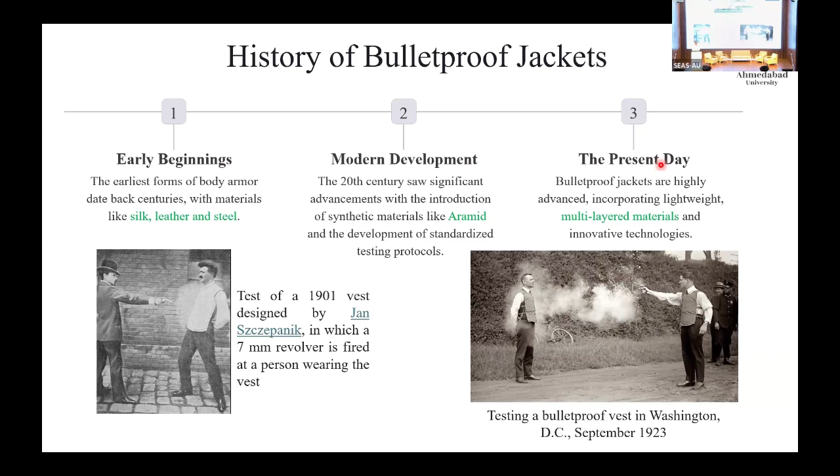Present day, the technologies have changed a lot. Before studying any issue, I call it a virus. So if you have to develop an antivirus, first you should understand what the virus is.

In the Indian context, this facility, or this standard, was defined. Generally we follow US or global standards, but fortunately in 2018 Indian standards were defined. As you can see here, we have designated them as BIS level 1 to level 6.

For your ease, I have mentioned which weapon applies. If it is a pocket-held weapon, probably it's a 9 × 19 mm, so you call it a pistol. This is the smallest possible threat, and there is a speed associated with it and a mass of the bullet. Of course, there are some testing parameters, so you can leave that.

AK-47 you keep hearing about in the news and whatnot. Why so? Because it's an interesting weapon—it's short in size, has a good range, is relatively light in weight, and it has got two locations at BIS level 2 and BIS level 5. You've got the same weapon, but there are two different types of bullets—or at least for now we'll consider two; there are actually more than a dozen.

BIS level 2 has got 7.62 × 39 mm. This is a mild steel core bullet. If I have to differentiate, for the audience from non-engineering backgrounds: mild steel is just like a door frame, whereas your kitchen knife is hard steel. It's really difficult to make a scratch on a kitchen knife, whereas you can comfortably make a scratch on any door or general purpose steel piece.

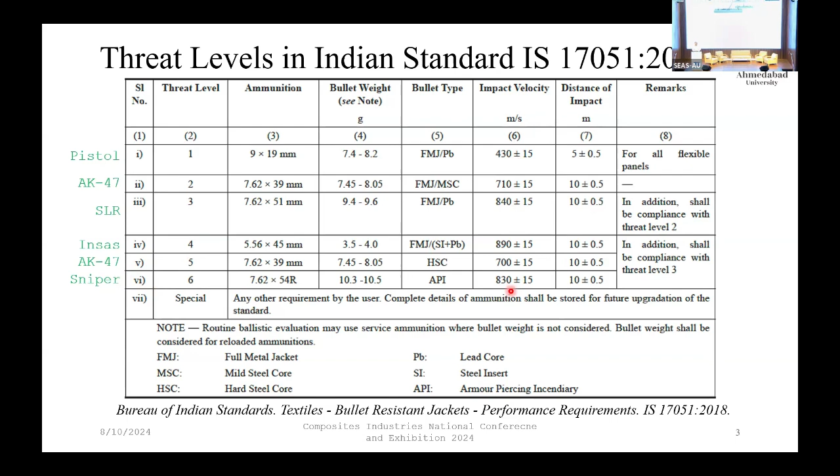So I presume we're all on the same page as far as this is concerned. This is derived primarily from the US standard. In the US standard, that is NIJ, level 2A, level 2, until the end of 3A, that is 0.44 Magnum. All these bullets can be stopped by a soft armor panel. They are relatively easy to stop, or we call them pocket-held weapons.

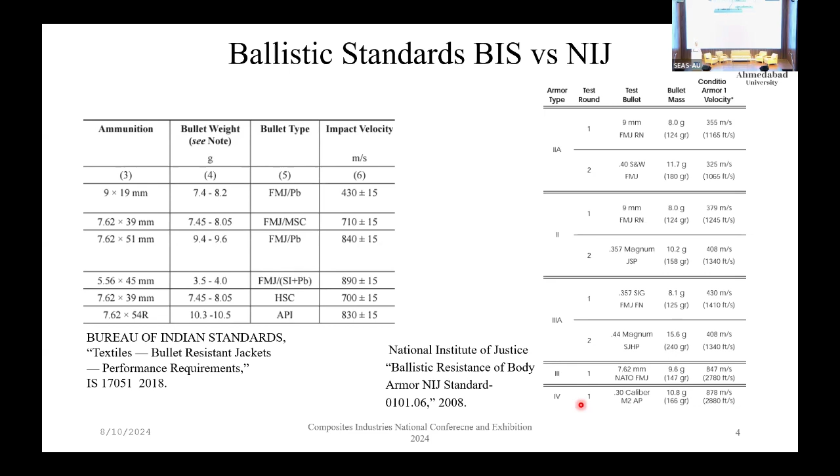After that, they directly have an international standard, NATO standard bullet, that is 7.62 cross 51mm or M80 NATO ball, and then the US has got APM2, which they simply call M2 - that is their US standard sniper round. India generally followed Russia for that matter, so we follow the Russian Dragunov. We have a slightly different version, we call it 54R API, that is armor piercing incendiary.

Now to understand what we mean by that, because we are not going to stop just one bullet - what is the kinetic energy of one? If I look at this, it is just below 700 joules of kinetic energy. If I go to this AK-47, it is above 2000. If we go for the international standard, it is above 3000.

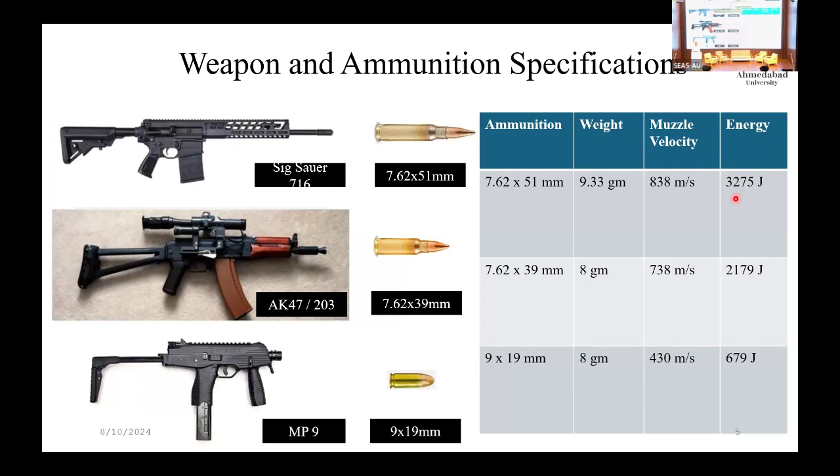But this is really dangerous. It has got the hardest possible core, which we'll see in the upcoming slide. The bullet is the most lethal one, and in reality the energy approaches 4000 joules. 150 joules is more than sufficient to kill a human - the impact, a head injury, is more than sufficient to kill a human. We are talking somewhere close to 4000. So that is the power of the so-called bullet.

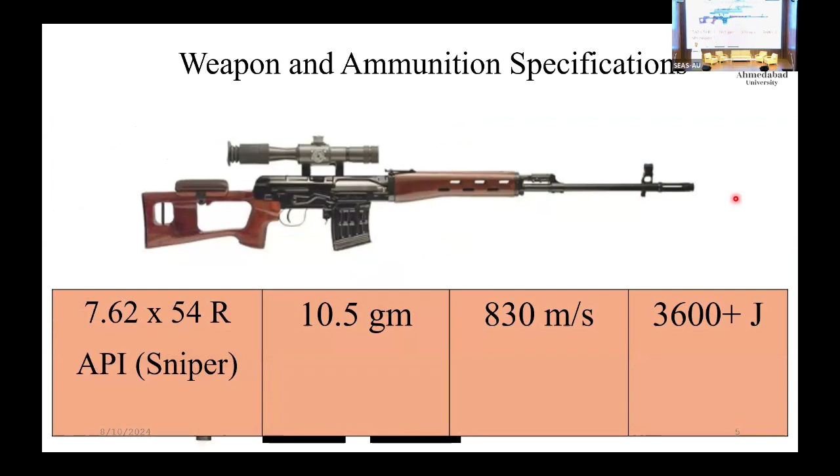Now what is inside this bullet? We used to machine them - we are engineers, so we cut them. We want to know what is inside. So we learned that mild steel has got a relatively flatter shape surrounded by some blackish material, which happens to be lead. And of course, to increase the life of the steel barrel, we always provide a brass or copper jacketing - that is what we call FMJ, full metal jacketed, basically a covering of brass so my barrel is not worn.

If both the barrel and the bullet are steel, then my barrel won't last very long. If we cut the complete bullet, we found there are a variety of cores inside. If we look at only the left side of it, this tip is very sharp compared to the other one - this bottommost mild steel is the international standard AK-47 bullet, which is a mild steel core bullet.

Whereas this one is available only with India and two of the northern region neighbors. If we look at the hardness, typically mild steel core, MSC, is 20 to 26, whereas for HSC it is 50 plus or minus 5. So unfortunately, no plastic can handle this kind of hardness at these given energies.

And if we look at the sniper round, it is even harder. To give a scientific challenge - in India, we do not produce the core. This particular pin you can see, this is what we call the steel core of a projectile or the bullet. We still do not produce this 65 plus or minus HRC core.

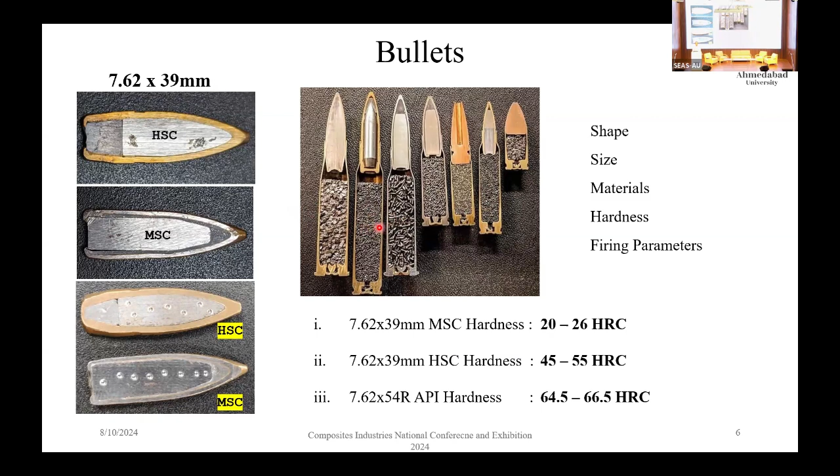And if I know what the other person is wearing, you just need to increase this powdered part, which happens to be the explosive. So let's say you have an Indian AK-47 HSC round - the speed is 710 meters per second. If you increase the weight of the explosive by a few milligrams, your bullet will be moving at a speed of say 750, and you designed a jacket for 710 plus or minus 15.

So that is where the things matter. We are looking for two types of panels. One is the soft armor panel, which is close to or touching the human body. In general, it is termed as the vest. If someone is wearing it, you won't be able to differentiate whether he is wearing it or not.

Whereas a hard armor panel, which is the front side in this figure, has got so many components. The two primary things are: first, we need to erode the steel part. Second, we need to stop the debris of the steel as well as whatever we have broken in the name of stopping this projectile. So we use boron, silicon, or aluminum oxide, as in ceramics. It could be single material or hybrid. That is the front part of it.

Basically, we look to either break the bullet, grind the bullet, or blunt the bullet. Those are the only ways that we can limit it. In the process, we will end up damaging this ceramic. If I am having a cup of tea and I drop it, that too is a ceramic. So ceramics are extremely brittle, very poor in tension. They can't take bending loads, they can't take tensile loads, so they will break.

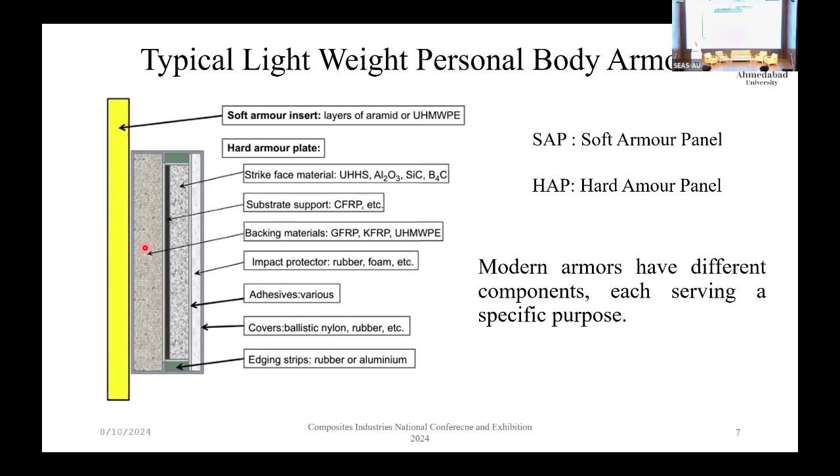So there will be a lot of crushing. Now we need to trap that entire crushed ceramic along with the debris of maybe two or more pieces of grinded bullet. Those need to be stopped. So we need a backing, and for that we solely rely on fiber reinforced composites. Earlier this used to be Kevlar, now we don't prefer that. Companies use it for commercial cost reasons, but UHMWPE happens to be the best serving material.

In engineering, if you are doing something, design is a must. So finite element based simulations or designs are the first step to start with, but unfortunately, in ballistics we don't know the answer. Fortunately, in all other engineering domains, we are not designing the product to damage it. We design the product such that it remains within the yield limit.

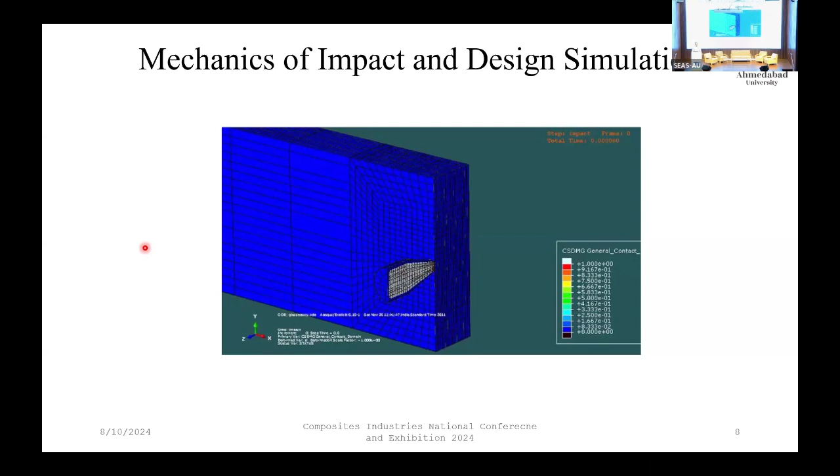We always look for the loading to be well within the modulus of elasticity of a material system, and in case of a bullet, we are very much sure that the very loading point would result in damage — crossing the ultimate tensile or ultimate compression, the ultimate strength point basically. So the challenges are multifold. Still, you need to characterize what materials you are having, determine all possible properties with respect to a ballistics model, and then see how your things are working.

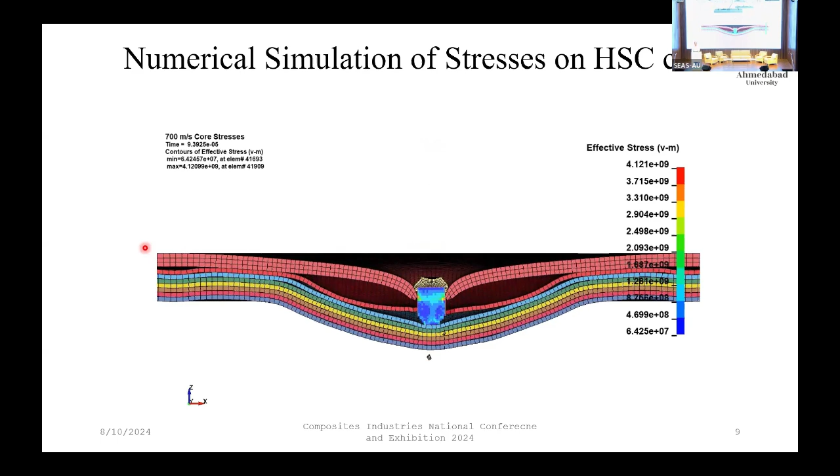So at the top we have got a ceramic layer, and at the back we are planning for some UHMWPE, and we define all the properties. Yet it might not behave like that, because when I fire a single bullet, the bullet is stopped and I can see so many cracks. So can I fire a second bullet? Because there are many unanswered questions.

In reality, a panel will be tested against either 6 bullets or 8 bullets. If it's a sniper round, it's 6 bullets; 9mm will be 6 bullets; in between, all will be tested against 8 bullets, which is quite a large number. It is assumed that a human is wearing a 1000 square centimeter panel, that is the human chest area, and 8 bullets are to be fired within this smaller space. And needless to say, one bullet is more than sufficient to kill a human.

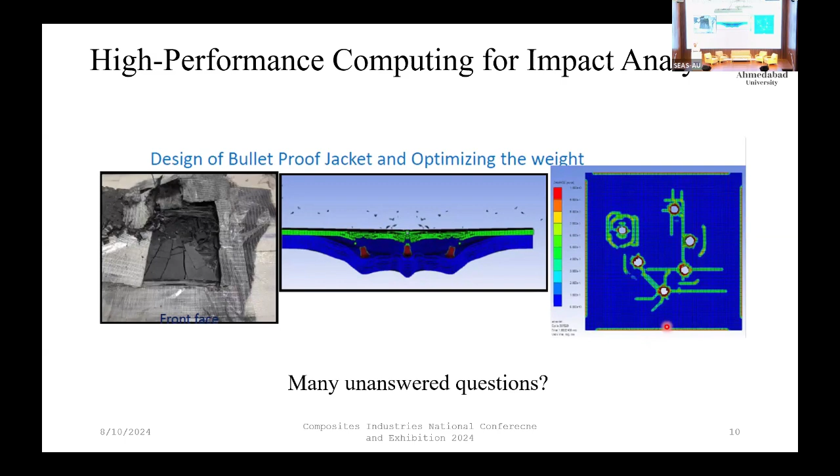So there are many unanswered questions — how these cracks will propagate, what kind of damages will happen. So designing becomes challenging. As Professor Shyam mentioned, he is going to teach these aspects of design in the course of Masters of Composite. So here we see what happens.

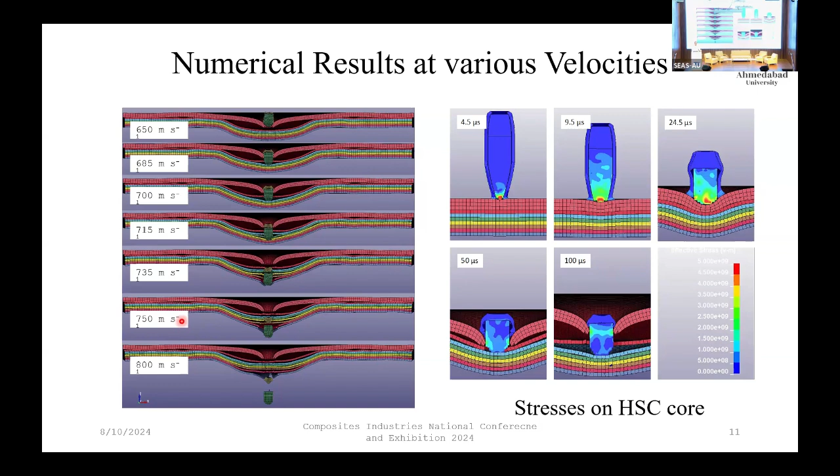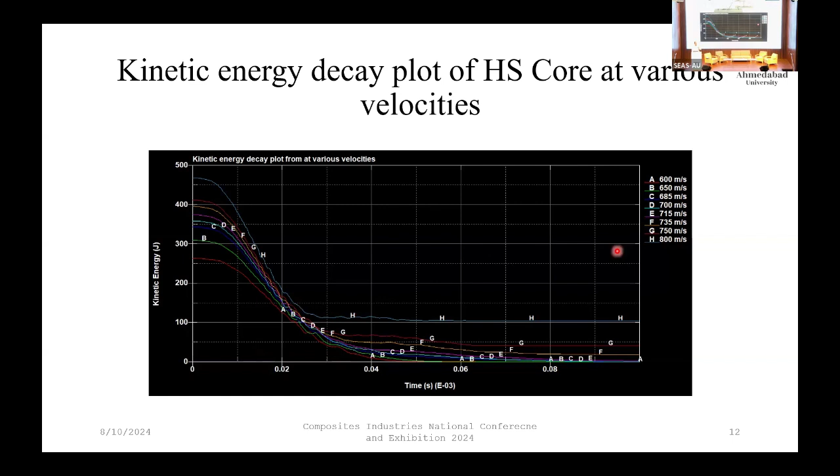Something unique with composites is that it's not a metal. Had it been metal, we could have cast and rolled it, things would have been uniform, but here every specimen has to be made precisely. So things are challenging, and we need to precisely calculate what should be the thickness of the given material.

Kevlar, when it came into existence, was a very good material, but now we have reached the limiting condition of the polymer chemistry of Kevlars, so it can't move ahead much. Whereas UHMWPE started close to Kevlar and now it is moving up. Both the modulus and tenacity, the diameter is decreasing, density is decreasing, and strength is increasing. That is the beauty of UHMWPE.

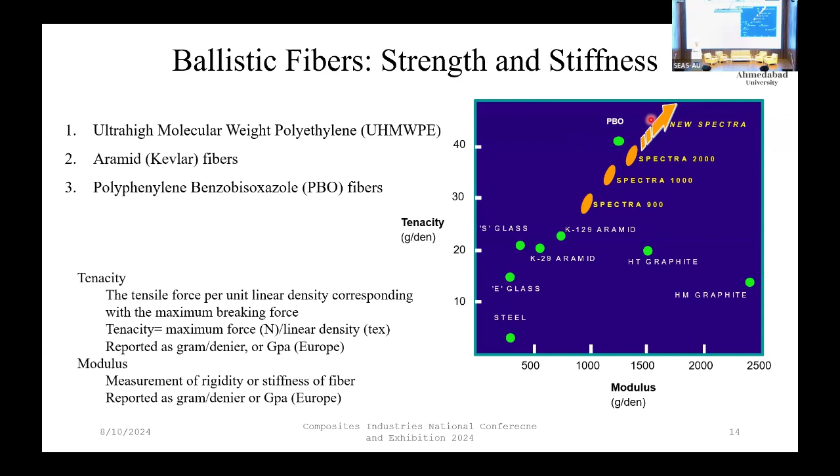Kevlar is the second best material, but there are few issues with it, yet it is required for specific reasons: high strength, excellent chemical resistance. By the way, let me tell you, UHMWPE is that simple plastic bag which you carry for household stuff. It's only the ultra high molecular weight of this polymer that matters. Otherwise, it's just polyethylene, the bag of polyethylene.

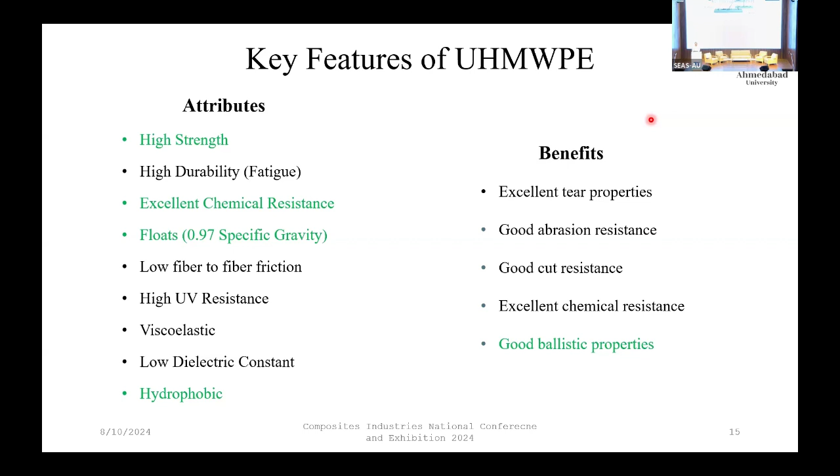The density of a UHMWPE made composite panel is 0.97. Water is 1, so it also serves the purpose of floating a human body. It helps in crossing a river or won't let you drown in an accidental case. Plastics are not happy with water, so they are hydrophobic in nature, they repel it, whereas Kevlar absorbs, or the properties of Kevlar deteriorate when exposed to UV, sunlight and moisture. Whereas UHMWPE is not at all affected by moisture, though light might affect it, but not much study is available. The biggest benefit associated with UHMWPE is its ballistic resistance, the bulletproofing capability, other than its other properties.

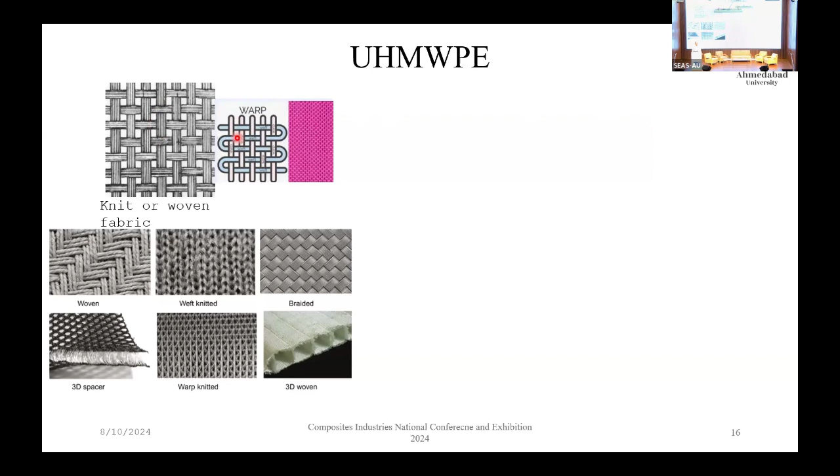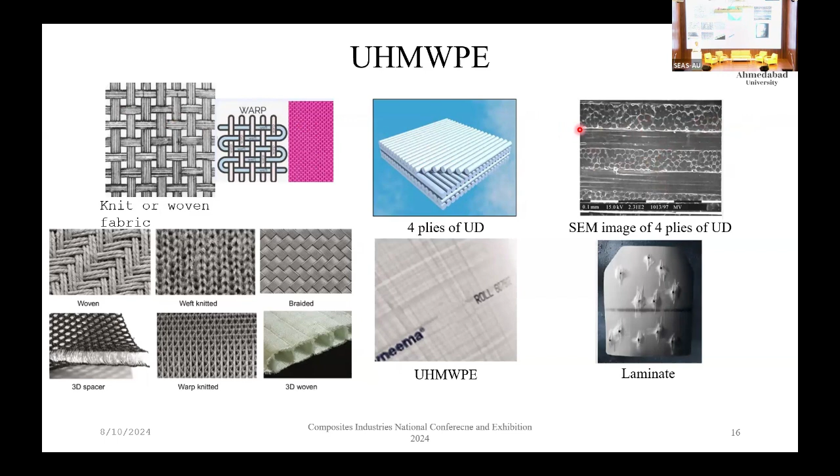That is the reason that in case of UHMWPE, we look for UD ply, that is unidirectional plies. This figure shows most commercial grades of UHMWPE have 4 plies at 0, 90, 0, 90, which makes one thin layer of fabric. If we cut a ply and see it under scanning electron microscopy, this is how they look: the long pipe-type things are the longitudinal fiber, and all the circles are the 90 degree, that is the perpendicular fiber. This is how the fabric looks, and this is of course a tested laminate.

Still, what is the biggest challenge? As we know, it's a plastic, so melting point is somewhere around 142, 144 degrees for polyethylene. Beyond that temperature, things are in trouble. And hardness of bullet is beyond our control because it will be fired. So the moment we exceed the limits of 25 HRC or mild steel core bullet, plastics can't handle that much. We can increase the thickness, we can restrict or limit the kinetic energy had it been lead or mild steel, but since it's a hard steel bullet, AK or sniper, these materials are not going to serve.

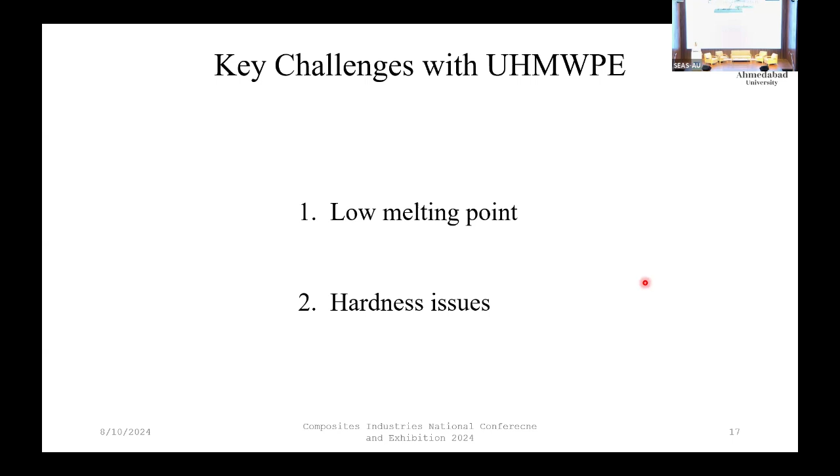Yet we need to stop the bullet, so we studied a variety of materials across mankind. Steel is the best possible option, but density is the biggest challenge, almost 8,000. So the best outcome came in the form of ceramics.

Ceramics have some unique properties: very good compressive strength and the ability to wear any material. The only challenge associated with ceramics is they are very poor in bending and tension. So if there is any bending phenomena, the strain to failure is very, very low.

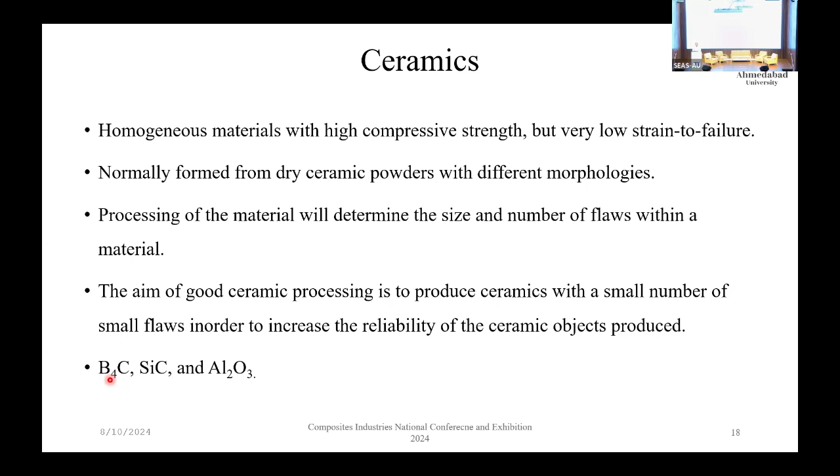So the moment we try to press the bullet inside, it will develop a brittle failure or brittle crack in the material. The most commonly used materials for this case are boron carbide, silicon carbide, and to some extent aluminum oxide. Presently, the cost efficient solutions comprise a hybrid of boron and silicon, because boron is very costly and silicon is slightly less costly, but the density of silicon is slightly higher than boron. So it's like a compromise between cost and technology. If you want the best possible solution, go with boron carbide, but then the costs are highest.

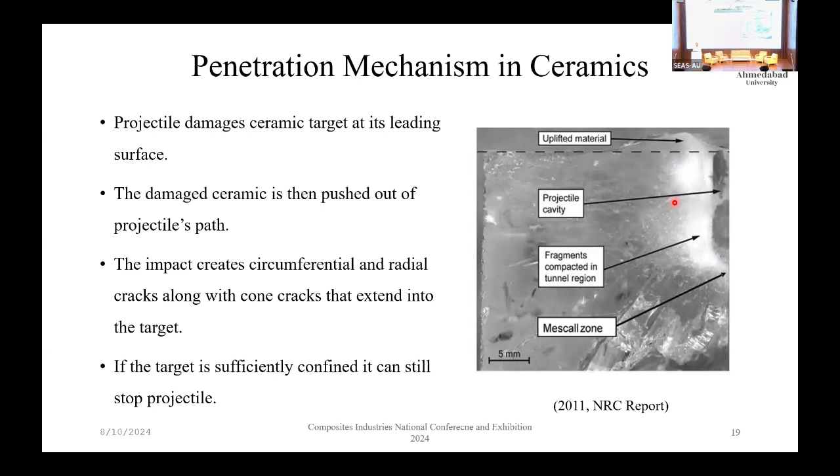Many studies were done to see how penetration happens. The projectile damages ceramic at its leading surface. In this figure, these are some of the earlier studies showing how the material gets lifted, how a cavity is created, fragmentation occurs, and a zone forms wherein the material will try to bend and cracks will initiate. But we need to stop that - this is unavoidable. In the next figure, we'll see exactly what the mechanism is. The moment the bullet hits, there will be a zone of compression.

So there is a projectile. When it touches the ceramic, it will try to create a zone of compression. As a result, a stress wave will travel through the depth direction till the end of the specimen, and that will lead to shearing, compression of the material ahead of it. That will result in pulverization, converting the ceramic back into powder or pieces.

In turn, that will lead to compression, and that means tensile phenomena - we are trying to bend a specimen, and we already discussed that ceramics are very poor in tension. If I have that teacup, I can't bend it. Had it been plastic, I could comfortably bend it. So as a result, there will be a lot of damage.

Now, the good part is my tip of the bullet is damaged because of this abrasive tool. A lot of material of high hardness, that steel, is worn - that grinding phenomena is done - but now we have a lot of debris of this ceramic along with two or more pieces of left out bullet, which are still moving at very high kinetic energy.

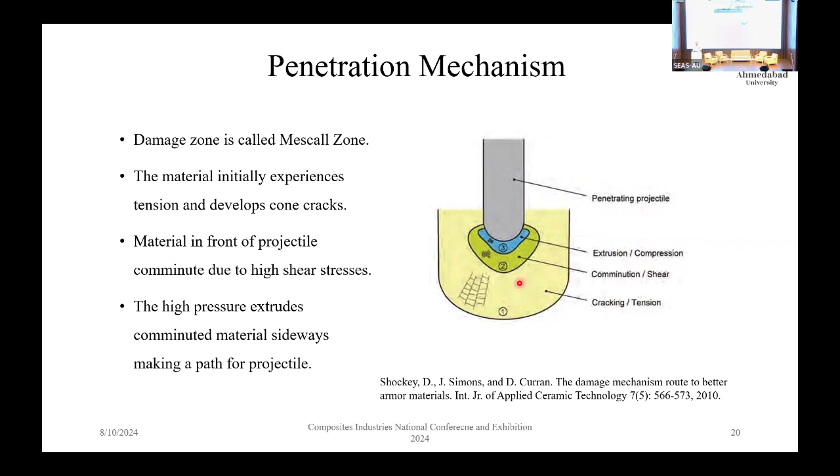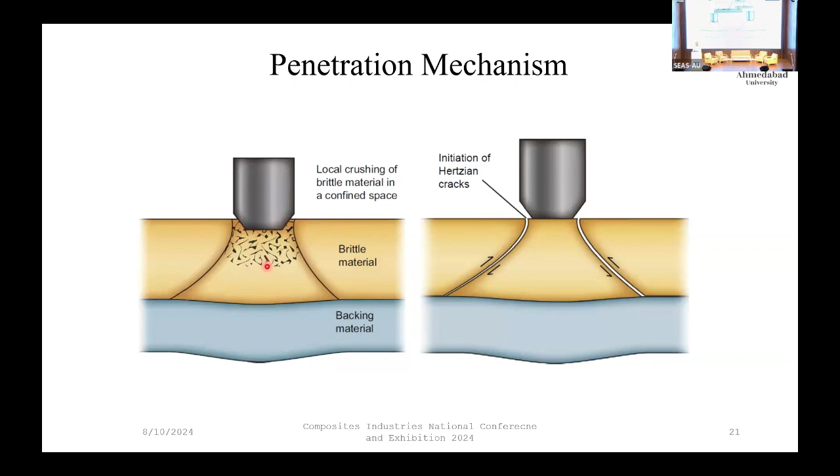So at the back of that, we place a backing material, which can be ultra high molecular weight polyethylene. And this is how a crack will grow. Here we can see the bending phenomena - part of the material is trying to remain there and a part is being pushed. So a specific type of cone will be created depending on the composition and processing of the ceramics. In turn, this tip of the bullet will perform grinding or pulverization of the material in front of it.

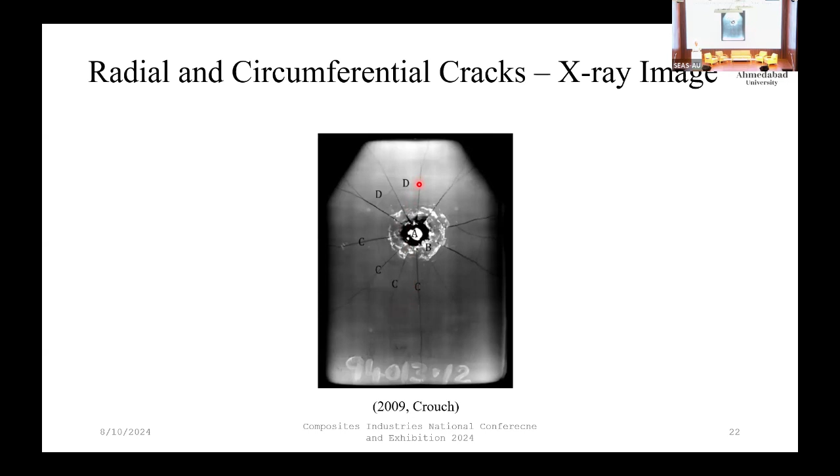And that figure confirms that a second or third bullet hit is not a very good idea. Because unfortunately, if I mark this point next to D - my red marker is the spot of the bullet - we can appreciate that it has a good space to move in between a cracked line. So perforation is possible. If not the second shot, maybe the third, maybe the fourth - we have to go till 7 and 8.

In another study, the perpendicular direction was studied to see what happens, primarily to understand how much ceramic material is lost, and what kind of damage and deformation occurs with respect to time as the projectile goes through.

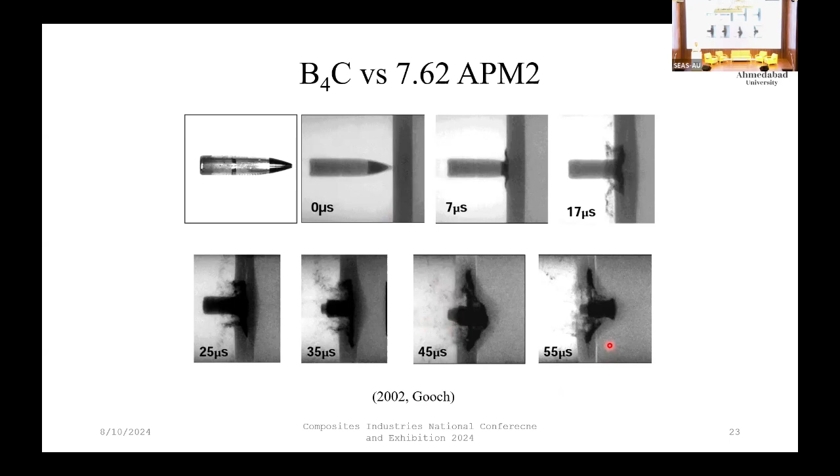APM2 moves at about 860 to 870 meters per second, so the time requirements are going down. Within a very short span of time, the entire phenomena is over.

Now let's come to manufacturing. I won't go too deep, since many presenters before me have discussed this. This is a unique system primarily developed for the automobile industry, but in processing polymer based composites, compression molding is the key process for processing UHMWPE or even Kevlar.

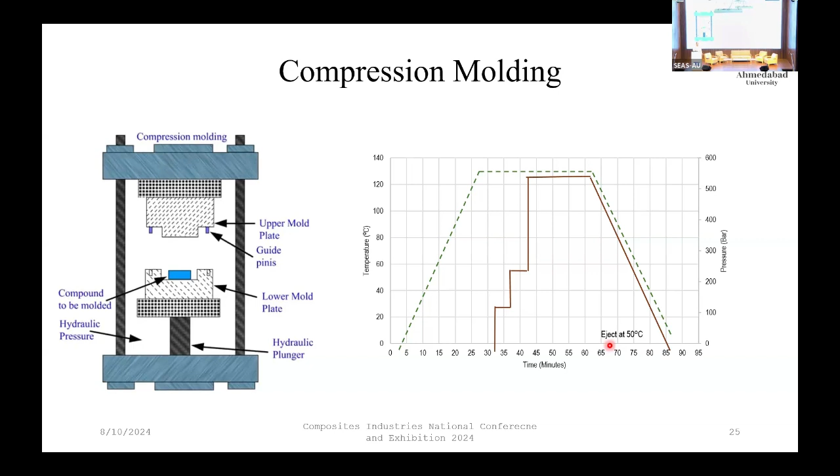This is one of the cycles we use. The difference is that the pressures required here are very, very high. For temperature processing of any material, the temperature might be defined by the OEM, the supplier of the raw material.

In a study, we performed compression molding at a constant pressure of 34.5 bar, keeping the grade constant, though for obvious reasons I can't declare the grades here. We found that the strength of this material is somewhere around 450 megapascals.

Then we increased the pressure while the temperature remained constant and processing time was 30 minutes. We increased the pressure by 4 times. Basically I am having, let's say, 10 layers of material.

Earlier that was pressed at 34.5. In another specimen or cycle, it was pressed at 4 times the pressure, that is 138 bar. We observed that the strength increased from almost 450 to nearly 600 megapascals.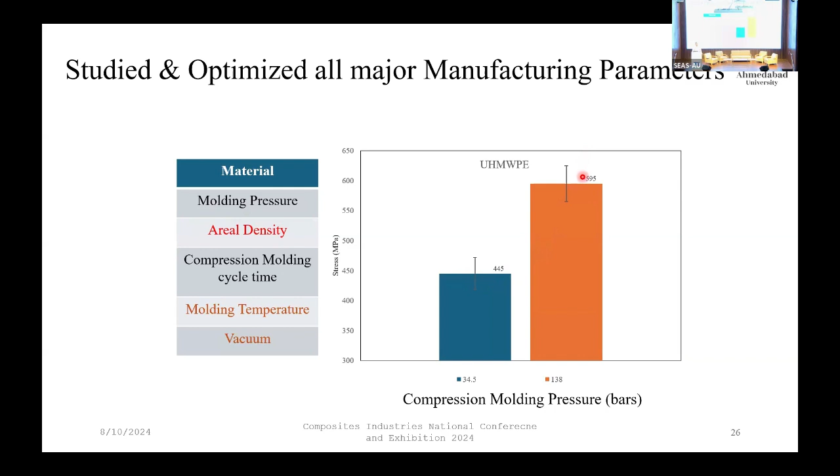This is the beauty of it - many who start businesses in ballistics and bulletproofing say, we know how many layers are required and we'll make it. But they miss optimizing the processing parameters, and there is a very thin line, a very small zone of optimal processing area, what we call the optimal zone. That is how these things matter.

Had it been the perfect one, we'd see reds and whites - reds meaning defect and whites meaning inappropriate consolidation. If it is a perfectly consolidated material, the outcome of a C-scan would be a completely blue screen, something like this, though it might have a couple of defects that aren't visible.

Over here I can see something just above my cursor. These types of very fine defects are acceptable, but not like the previous screen.

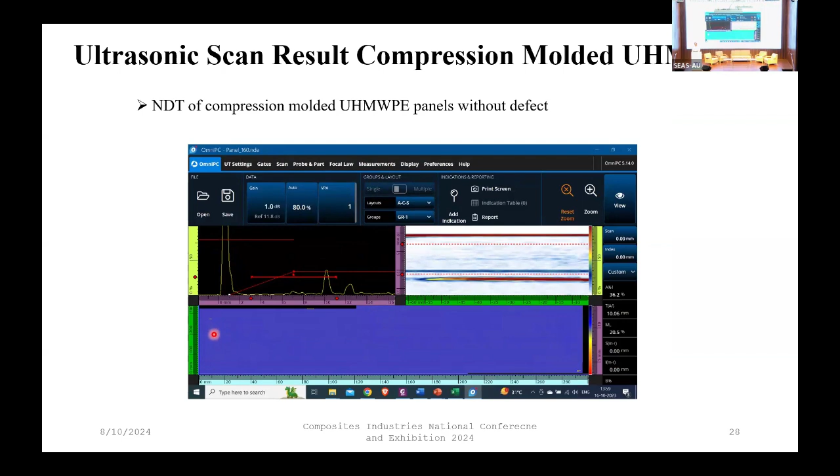Now, how to integrate ceramics with UHMWPE. In one image we saw that if the ceramic plate is integral, one piece, what we call monolithic ceramic, then one bullet is sufficient to generate cracks till the end.

So what we did, we took 30mm hex or 30mm square tiles, so that when a bullet hits, only a small group of maybe 1 or maximum 7 tiles - 1 at the center and 6 touching it - will be damaged. Other sides are at least safe.

The process required here is you should first have your compression molded UHMWPE laminate ready, and then there is an entire series of what we call the process of autoclave. Many presenters before me have discussed this, so I won't go into it. We need to apply a suitable glue on top of the UHMWPE.

Appropriately treated ceramic, wrap it with this yellow colored Kevlar. Now this is also a unique phenomena. You need one layer of Kevlar. When we are spending so much on UHMWPE, we could have skipped Kevlar for one layer.

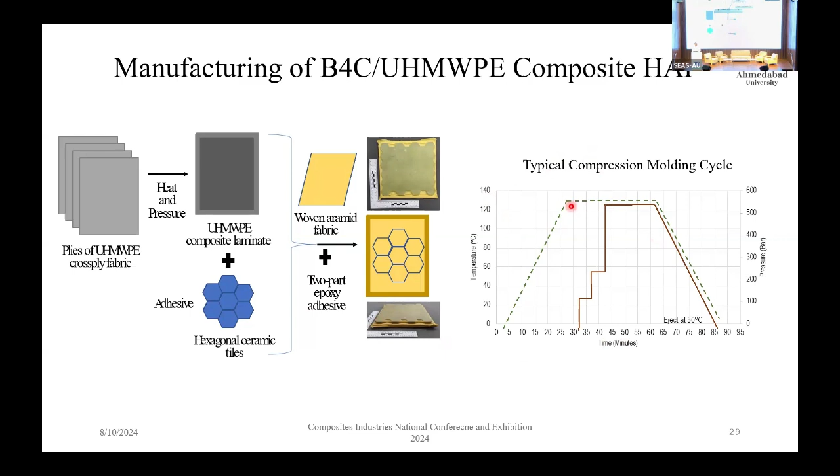But the properties we are getting and the resulting outcomes are well met by Kevlar, not by UHMWPE. So we have to study and optimize our system, and this is a cycle which we follow for compression molding. With that, we come to a point wherein we got a BIS level 2 and level 3 panel. BIS level 2 and 3 means MSC AK-47 and M80 NATO ball, whereas level 5 and 6 is AK-47 hard steel and a sniper.

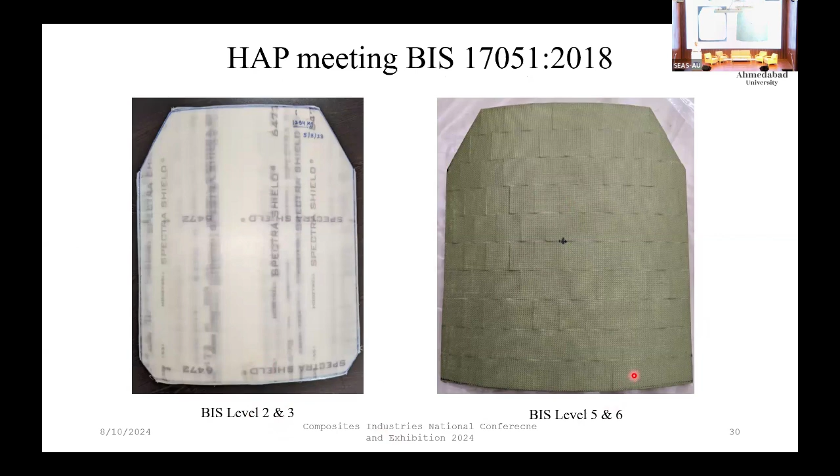So this is how the panels look like. If you are interested, you can contact me later. I have it for testing. If you have a panel, go for the testing. It feels like, okay, we should have a weapon, fire it, and it's over. It's not over. There is a BIS standard and there is a test protocol, and that is really very, very rigorous.

Why so? Because we made a panel today and we will test it tomorrow, definitely the bullet will stop. But maybe the panel will be used 5 years from now, or it was being used but there was no bullet hit luckily. What is the condition of the panel 5 years from now? So for that we have an aging cycle. There is an 11-day thermomechanical conditioning cycle, wherein in the span of a very short 11-day cycle, it is equal to a 5-year lived ballistic panel, and then testing is to be done.

So generally a fresh made panel on the 12th day may fail. Likewise, an army man may have to cross a river body, or there could be a shower at any moment, like we are crossing every now and then. So if wetted - because in case of steel there was no issue, then came Kevlar. For almost 30 years Kevlar was the boss, market leader, and it was very well affected by moisture.

So there was a scheme for this - in internationals it is 1 hour, 60 minutes, and in Indian standard it is now 30 minutes, because of the obvious reason that now we have technologies to seal the panel perfectly, so there is no scope of water ingress.

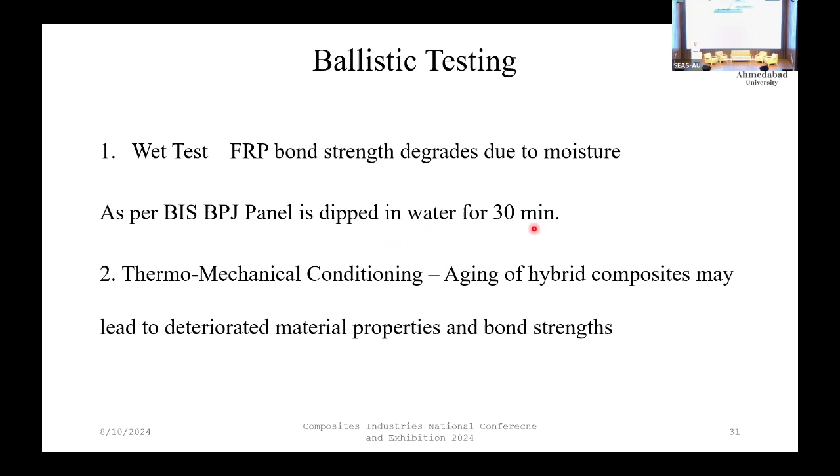None of the test agencies allow you to take a picture, but for your understanding, I took pictures from some of the army base and they are unnamed, so it's fine. The standard is 10-meter distance, so there will be a tip of the barrel from which the bullet will exit, and exactly at 10-meter distance should be your target. Over there, we place a chronograph.

In reality, we have IR screens, but in a field trial, we can't have the IR screens - it's a complex phenomena. So we placed a mechanism basically to measure the speed of the bullet just before it hits the panel, that is 2.5 meters from the panel to be tested. And to record how the entire event happened, we used a high-speed camera.

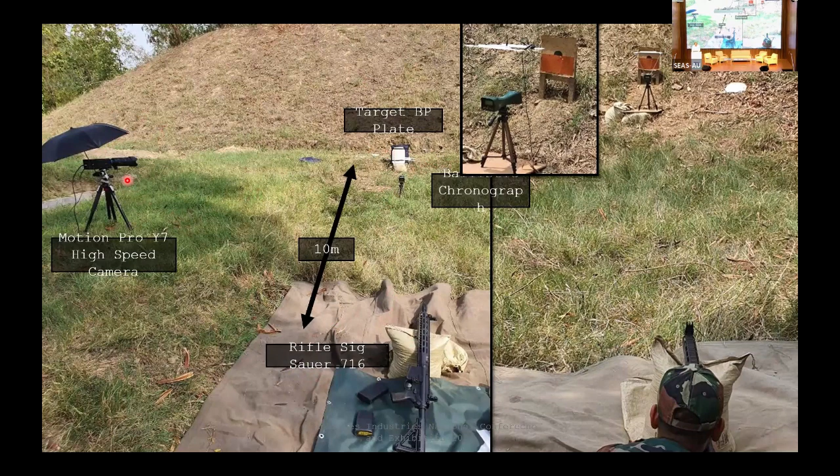But for now, let's continue with - if we tested n number of panels, can we find some science behind it? So we developed a unique scheme for AK-47 at least, that on one side of this central original core, that is unimpacted bullets, we cut the bullet and took out the steel part of it. On the left side, I hope all of you can appreciate the heights are less compared to the right side.

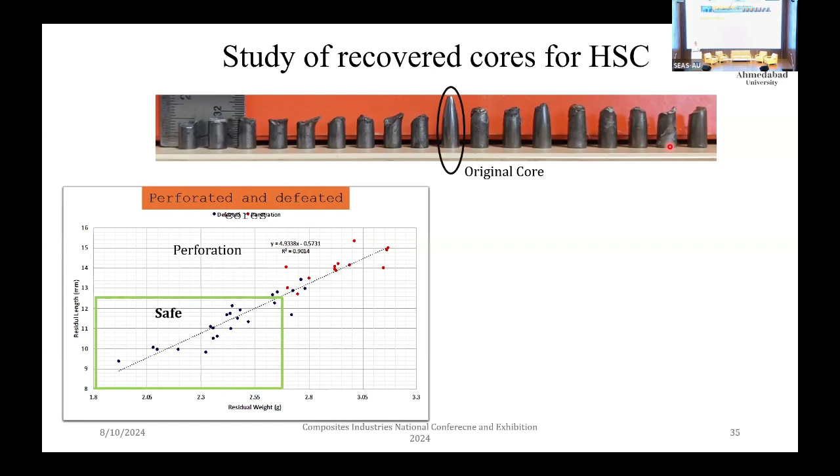We analyzed that if the bullet is stopped, the amount of wear, reduction in length, and reduction in weight can be very well correlated with a safe zone. So now we know that if the length of the AK-47 core, the residual core, is more than X, most probably it is perforated, and proportionally there will be a weight as well. So we correlated that and we've established a relation - it is this small 5.2 grams of steel which matters the most.

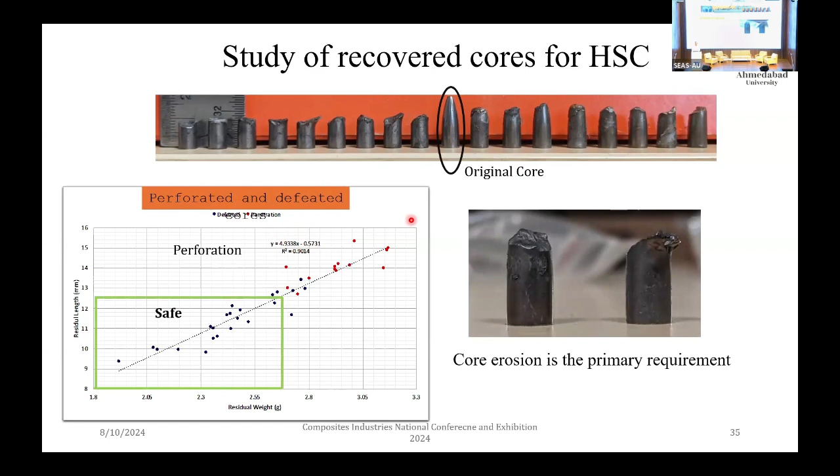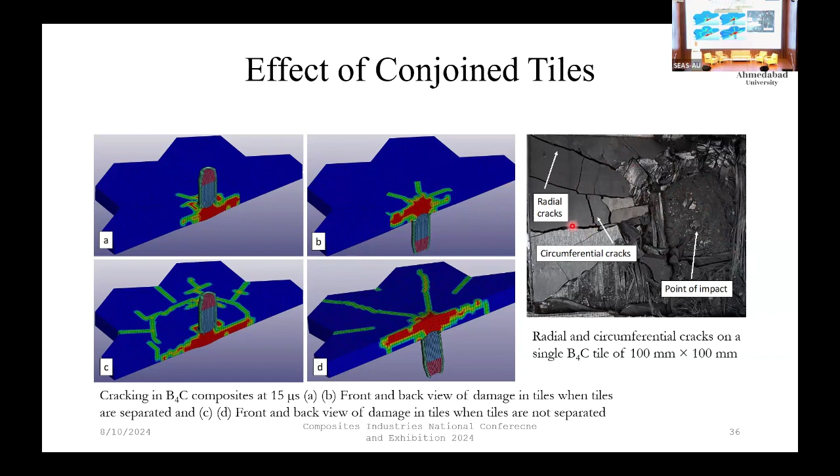If you have done everything, now let's better fine tune our simulation model, because we discussed at the very beginning that we don't have the properties, and whatever we use, generally we prefer that, okay, within the yield limit. But here everything will damage. So we optimize our model and correlate that - if I have a single shot phenomena, how does it go? So we match them. And if things are moving fine, that's good for us, or we can further optimize that. How about the mild steel core?

So this is how a mild steel, that is a deformable steel, will look like when trapped inside the panel. A couple of slides back I showed you a white colored panel. That panel, after hitting 8 shots of MSC, mild steel core AK-47, the bullets are trapped inside and very well deformed. The beauty is that with the first shot, the depth of penetration is minimum, but as you move on it keeps increasing in depth.

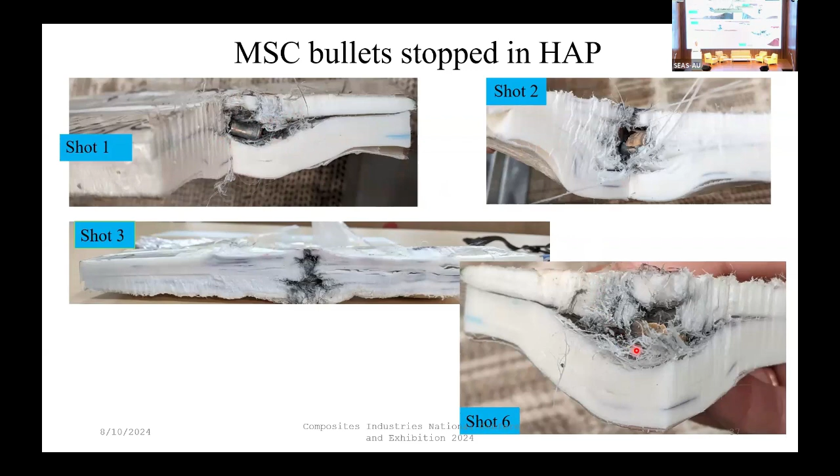Can we have NDT of the panel as well? Ultrasonic C-scan of UHMWPE is possible, but for small pieces of tiles it is impossible to go for ultrasonic C-scan. So we used to go for CT scan. I hope most of us know what a CT scan is, known to you for medical applications for the human body. We used to use the machine for our ballistic panel before the test and after the test.

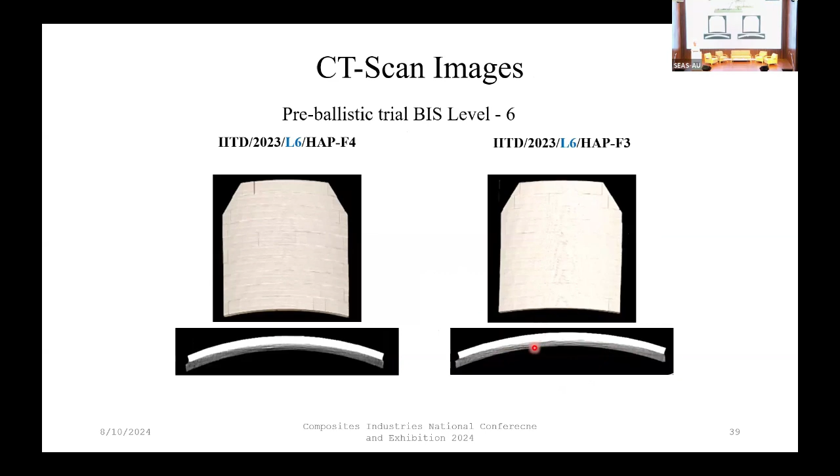Similarly, this was for sniper, this is for AK-47. The issue with this kind of system is the human body is not flat, there is a curvature. So when we place the small tiles on a curvature, there is a possibility of a defective zone. I hope you can appreciate the gap over here, but fortunately it is at the edge.

So we have a lot of rules to follow when testing. From any edge, and between any 2 shots, we cannot fire within a distance of 51 mm. Or simply put, no 2 shots can be closer than 51 mm. So from this edge also you have to be away by 51, and the tile is 30 mm.

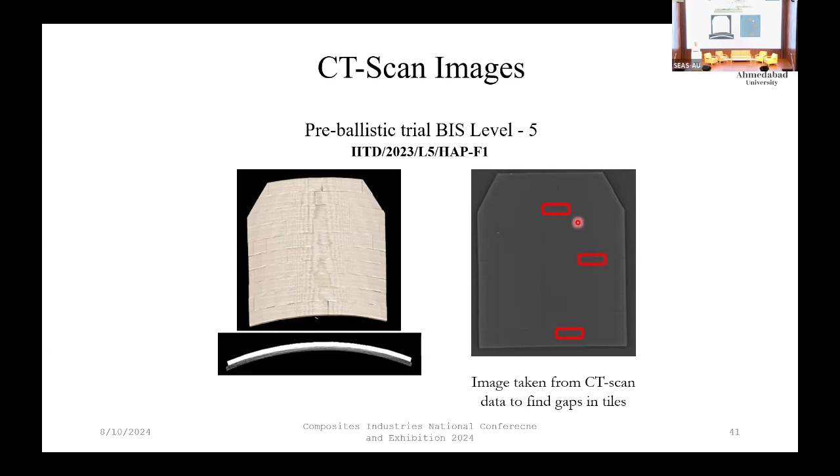So this point is safe, but there was a defect visible over here as well, a minor gap between the 2 tiles. If a bullet hits exactly at this point, there is a fairly good possibility that the bullet will make its way out in between the 2 tiles. So the test agency will take an X-ray of this, mark the exact spot where the maximum gap is, and they will fire the bullet there. That is what they call testing under the most rigorous conditions, because it's a question of life and death of a soldier.

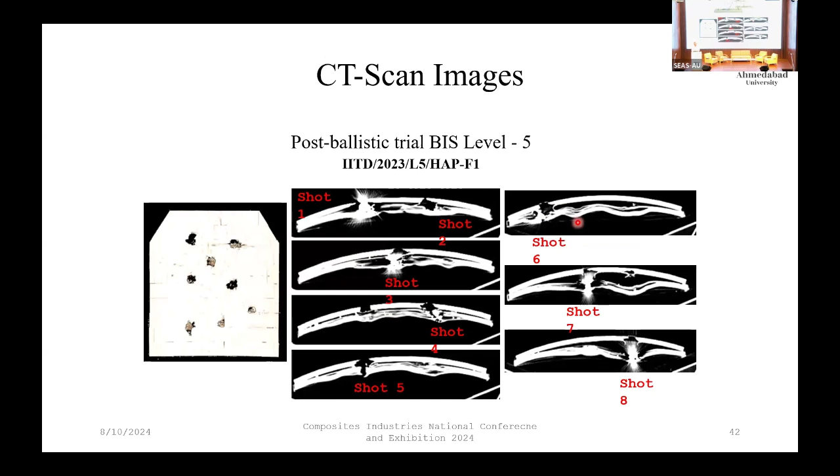So we tested all of them. These are all post-TMC, that is after thermomechanical conditioning. Put simply, it's a panel which was made last month, but has lived a life of 5 years. So after 5 years also, all 8 bullets are stopped. Level 2 and 3, as I mentioned earlier, lead and mild steel, are very easy to stop. So this is what we did in 2021.

Back face signature is another important phenomenon. We have seen deformation in these CT scans, and this deformation is to be taken up by the human body, and that's why we have a soft armor panel, something I didn't discuss because that's a very easy job. Stopping a 9mm bullet, compared to dealing with sniper and AKs, stopping a pistol which is a pocket-held weapon, is very easy. Though it has got 600 plus joules of energy, so one bullet has sufficient energy to kill more than one person.

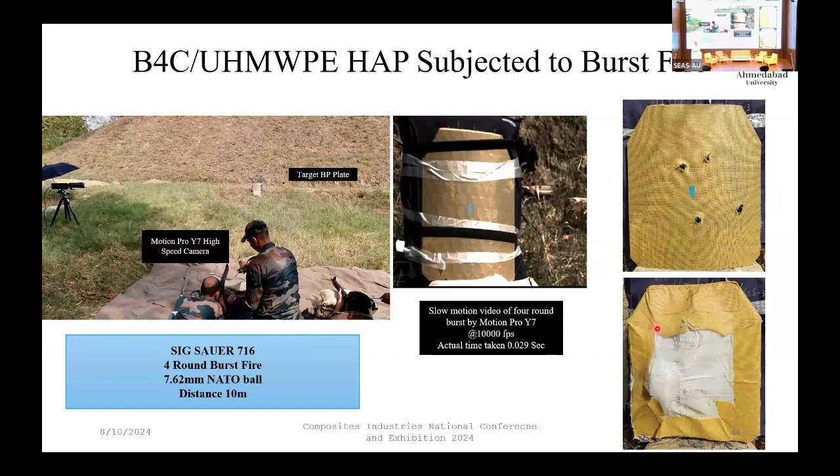What will happen to the human body? Now this sounds and feels, with the pictures and results, like everything is good. Yet if we look at another panel wherein few of the conditions couldn't be met, because the standards will always say that this is the set of conditions to be followed or met...

What if the bullet hits at 25 mm? We said it should be 51 mm away from edges and no 2 bullets closer than 51 mm to each other. But the bullet won't follow, it won't listen. So if it touches the corner of a panel, something like this, it will lead to this kind of deformation. Now this is an image from the internet, of course.

So this is what a 750 centimeter square panel looks like, the gray part of it. In the Indian Army, the requirement is 1000 centimeters, so it is slightly bigger than this. Yet if this kind of back face deformation happens, it is more than sufficient to comfortably break the rib cage, which will lead to immediate blood entering the lungs or bursting of the heart or liver.

If that happens, that soldier was the lucky one because he died immediately. If there is a lung puncture, he will definitely die, but slowly, if he couldn't be taken to the hospital. And generally in their case, what happens is these jackets, I can't cover all the aspects of it, but the jackets have a quick release mechanism.

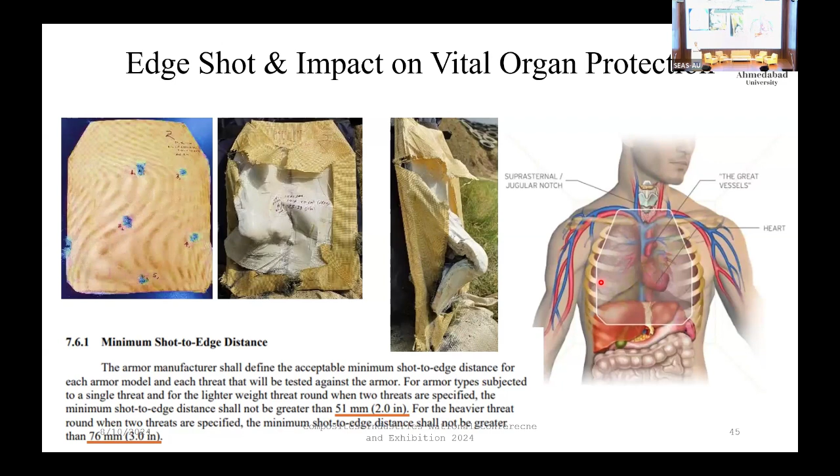Like the discussions at the IPAC or International Personal Armor Committee level are about what should be the minimum distance between the 2 shots. What if the rain, that is, n number of bullets, 100 or 150 bullets per minute, are coming at a single spot or very close by? So there is a fight between the two standards: 51 mm or 25 mm, because 25 is too close. We have seen the damage zone, which was pretty large.

This is a simple one for your understanding.

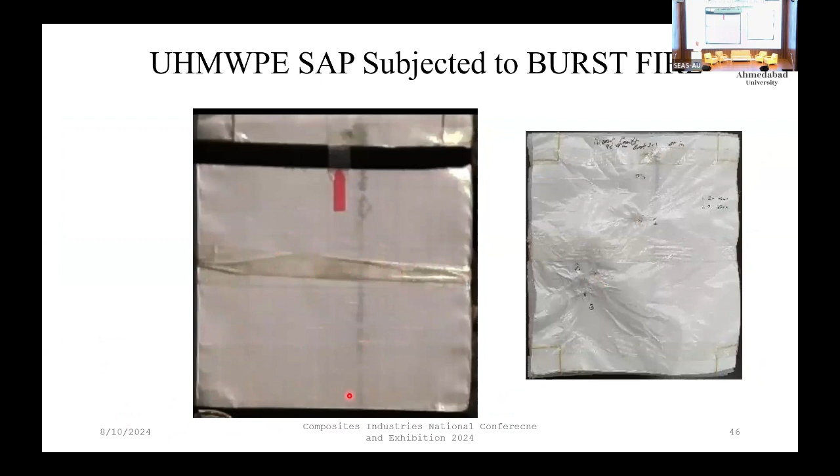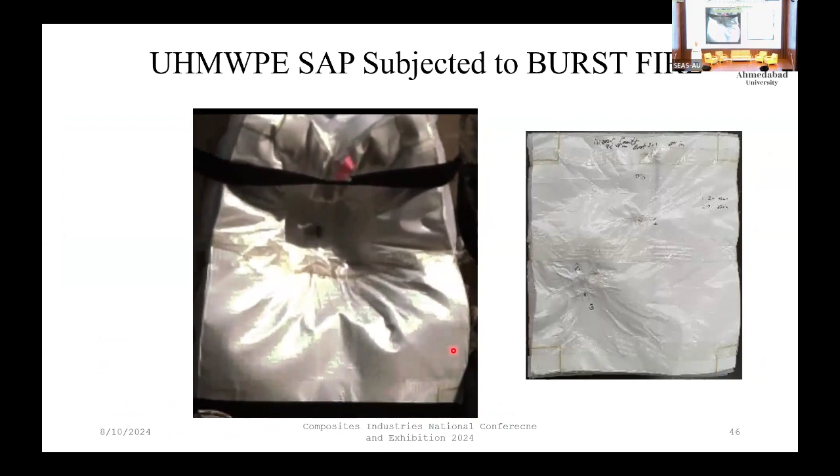Okay, this is a 9 mm bullet from a pistol, which you normally see with any policeman. This is a flexible material, UHMWPE, which can comfortably stop the bullet. You can see the bullet as well. And there comes the second one.

Now see the type of deformation it is going through. Though the bullet is stopped, on the right side of the image we can see the back of this panel, which is intact. There is no hole. So both the bullets are comfortably stopped.

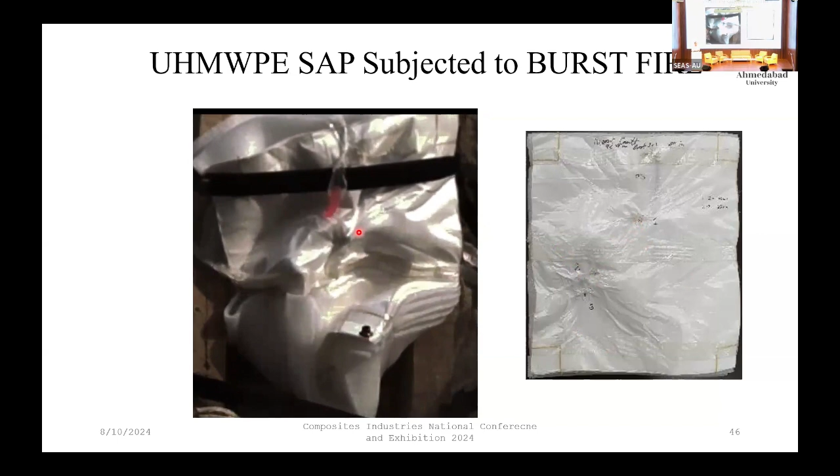But if we look at this particular phenomenon, how the fabric has bent - the time between these two shots is 0.05 seconds. The second bullet is coming much faster. And in case of rifles, it is somewhere around 0.02 seconds for the second bullet to come.

So what all are we looking for? We are looking for ballistic performance. The first target is please stop the bullet. Even if stopped, what is the blunt trauma? The deformation inside the human body is the blunt trauma. If it is beyond a limit, in NIJ, the US standard, it is allowed to go till 44 mm.

They say that the US soldier has got good healthy adipose tissue, so the chest muscles are quite thick. But in Indian context, they are much thinner, so the limit is 25 mm. And 25 mm, though it sounds like a good number, is very small when it comes to stopping the bullet.

In one of the slides, I have shown that for mild steel and NATO ball, we could stop the bullet within 10 mm, or for NATO ball actually it is 13 point something. But that is half of what the standards allow, 25 mm.

Then how about the multi-hit? It's not just one bullet - we are going to fire maybe 6 or 8 bullets. We need a setup very close to the bullet itself. These setups are very, very costly affairs.

And we need to measure both the entry velocity and, if there is an exit, what was the exit velocity. There lies the rarest of phenomena - that the bullet perforated, it passed the panel, but the velocity was such that skin or clothes could stop the bullet. So still the life is saved.

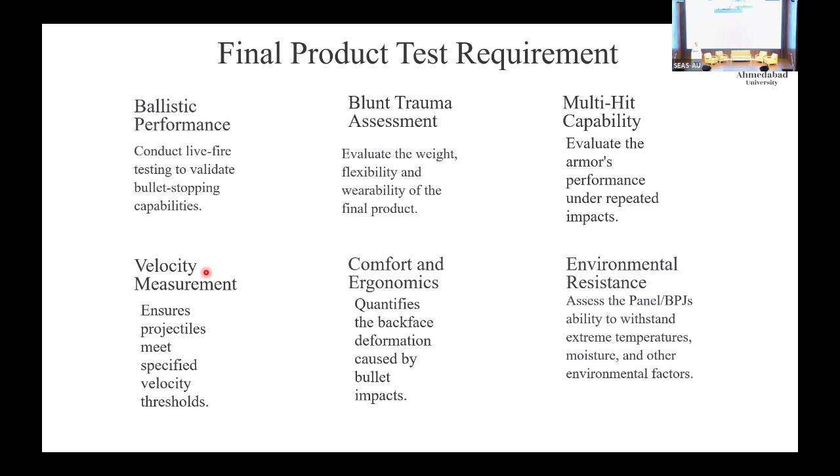And then finally the environmental resistance. Kashmir is Kashmir, Rajasthan is Rajasthan - I can't help it, nor can you. There is temperature, there is weather, there is moisture. So a lot of environmental parameters may also hamper the performance of a composite system.

Even if someone is making it, there is a second level of challenge: meeting all the compliances, certifications, agencies. Unfortunately in the Indian context we don't have a certification scheme. NIJ, in the US and the West, they have the certification. You once take the certificate and start producing, till we upgrade or change the standard. So achieving this certification to be recognized as a ballistic standard is essential for manufacturer and supplier - that's the first issue.

Then adherence to these protocols is another level. If you are making these panels, you have to have quality assurance. Putting the long story short, when an army order is supplied, one truck will carry 5,000 jackets. 10 jackets will be picked randomly, and if any kind of failure occurs - not just about stopping the bullet - one of the back face signatures turned out to be 25.1.

It's just 0.1 mm over. And we know from recent news what is the impact of 100 grams from sports. So 0.1 mm of exceeding the limit is equal to 5,000 jackets rejected, and it's a huge cost associated with that.

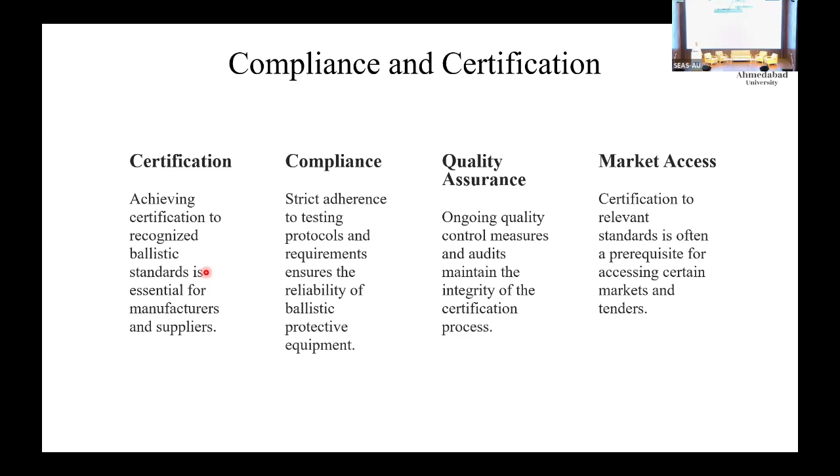And then, know the right market. Even if you have a certificate, and you know all the quality standards, accessing the right market with the right certification is another level of challenge. So there is a strong need for specialized, dedicated ballistic testing laboratories. In India we have only two - one for defense, in Chandigarh, and fortunately one for the home ministry, very close to you, in Gandhinagar.

We require highly trained, skilled staff. That is where we are planning, we chip in at research level, at PhD level and onwards, we have a lot of composite stories. But when it comes to ground level, who will operate the autoclave, who will operate the compression molding machine, who will perform all the cutting and manufacturing operations - for that we require labor, the manpower on the floor, and that needs to be trained, and none of the PhDs will generally go to that level. So we need to disseminate that information, that knowledge to the next level - that happens to be the MTech. So we are in that phase where we start with masters, then bachelors, and then things will percolate down to the shop floor so that we can produce the best quality composites, something which India is lacking till date. This can be proven by the growth of the aerospace industries, which happened 2 to 3 decades back in the West, and is now pacing in India.

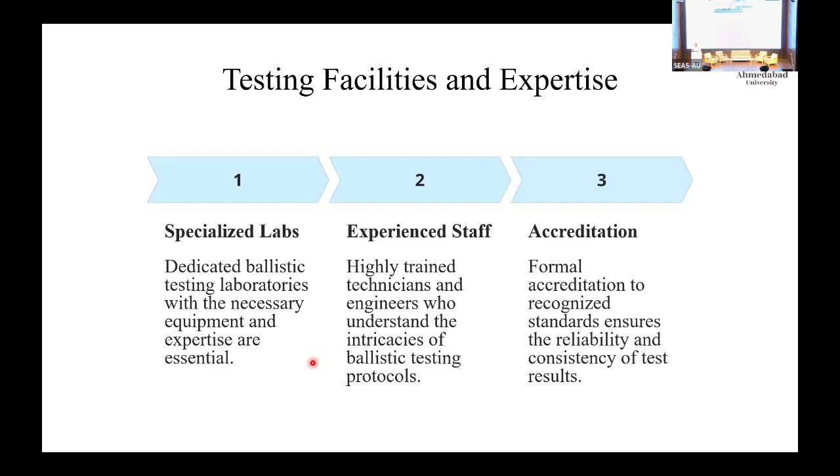And accreditation - I think we are very well known to them. At IIT Delhi, what we could achieve was that when we started in 2017, the Indian standard was a 10.4 kilogram jacket compliant to NIJ, because in 2017 there was no BIS. So we had a set of rules, a question paper you could say, that AK-47 hard steel core is the largest threat we have, and you need to decrease the weight from this 10.4 to somewhere around 8 kilogram. We were on that path, and 2018 came and the BIS standard came, so there was a minor variation in the speeds of the bullet and types of bullet and whatnot - the question paper actually changed in between while I was answering.

By the end of the project, somewhere around COVID times, the Indian Army said we have no threat because of AK-47 now at the Kashmir part of it, so we are only interested in sniper now - the front of the jacket should have protection against sniper. So again, the question paper changed towards the end of the project, and unfortunately for that part, there was no standard jacket available in India. So for both the solutions, we brought down the weight of a 10.4 plus kg jacket of the 2017 Indian standard to 8.2 kilogram - it runs 8 plus minus 200 grams, so generally 8 to 8.2 kilograms.

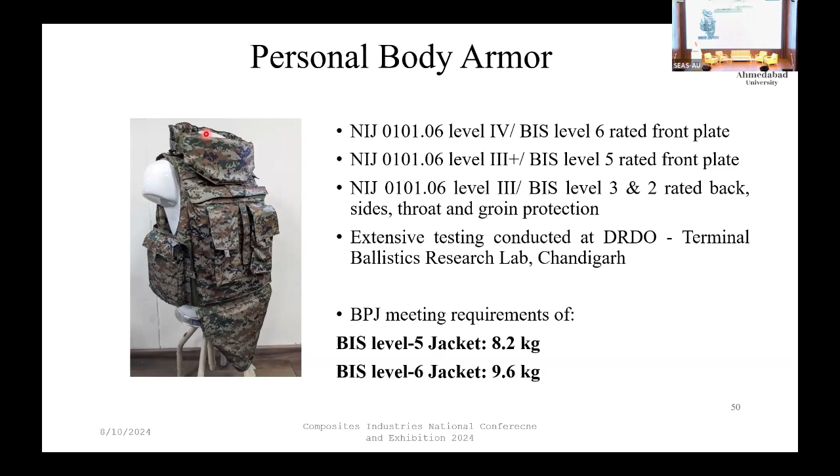So what and where is the future? Yes, we are looking for increased protection. What should be the ideal weight for a bulletproof jacket? Or what can be the ideal material for bulletproof, if I may?

Air is the best possible bulletproof jacket. The solution is, if there is a rifle with a range of 500 meters and you stand at 800 meters, air has got sufficient resistance and earth has got sufficient gravity, so the bullet will fall. But an army man can't say that. So we could pull it from 10 plus to 8, and the army says why can't you make it half kg or 0 kg kind of. So there lies a lot of scope in that domain.

Then enhance comfort. If you are given a 1 inch or 20 mm thick plate in front of your body, and something on the side, back and neck, you just can't move your head like that with all the safety gears in place. So comfort is another important thing, only possible when you decrease the thickness and weight. So there again lies a lot of scope.

Then integration of technologies. That is something everyone is talking about, but not much is going on that front. So a lot of scope lies in getting the real-time data, what kind of health he is having. Like a CO sitting at the base says you have crossed that peak, now start firing. He says, sir, I have climbed 200 meters and now I am dying for the breath.

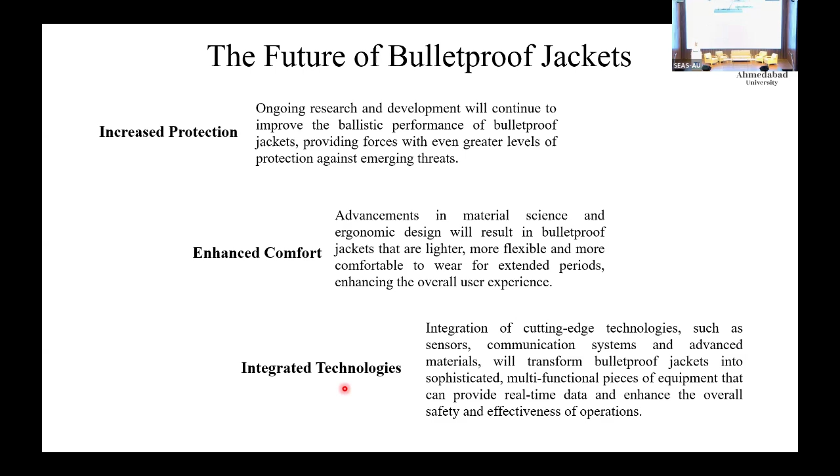Likewise, after the shot, what is the condition? And why to have a shot? Why not have more gadgets built into that?

So that is what I expect in future, here at Ahmedabad I am going to have a bulletproofing facility. We are in progress on that, in composites we will start more studies on composite materials, then incorporating nanotechnology. Like in the morning session, the BTRA director mentioned that not just carbon fiber, they have incorporated 0.05% of CNTs into the fiber, which enhances the properties like anything. So if we can incorporate that at the commercial level, the weights will come down drastically.

Biomimicry, what's commonly known as self-healing or self-repairing phenomena. So on those directions also, or at least repairing the BPJs, because the BPJ plates cost a lot. If one bullet is hit, we say one life is saved, that is one part of it, but then a huge cost is gone. Apart from that, the development of more and more lighter, more flexible, self-healing coatings so that the material can take care of itself, and with a lot of integrated sensors if we can have, nothing like that.

So on that front, yeah, I would like to take a few moments extra. We at School of Engineering are very soon going to have a learning factory, wherein a fully automated factory floor will be coming into existence, and KUKA robots, they are supplying us metal printers, not just 3D printing by polymers, but metal printers will be coming up.

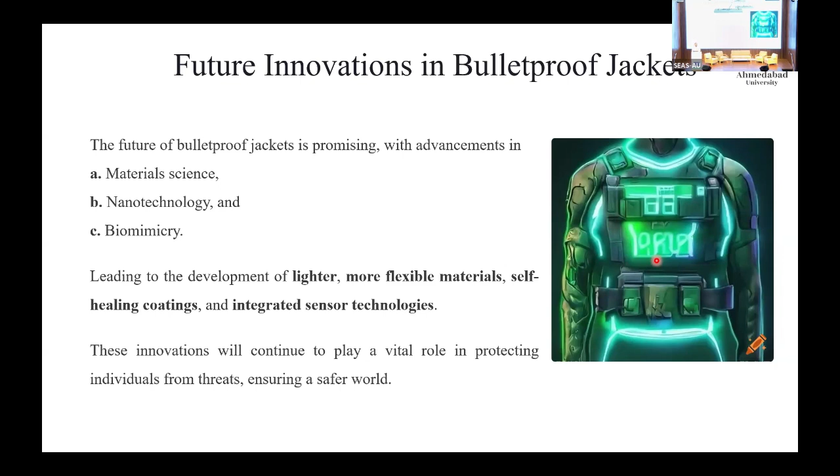In terms of bulletproof, coming back, in the technology world we have a term called TRL level. So generally, or even in the last one and a half day, you must have seen many technological outcomes that are the result of research being presented. That lies somewhere around basic principle, a concept, and a proof of concept at the max. So we say the TRL level is 1, 2, 3, 4, that's it. The education institutions generally don't go beyond that, but we at IIT could deliver.

It took a bit of time, but now we have all the relevant experience. So we have an integrated pilot system demonstrated. The product has complied and met all the standard requirements, and now it is going to the private players for mass production. And that thing is a closed chapter.

Now we are going to further continue on that journey, that why can't this 8 kilogram be brought down to 7 kilogram, and 9 plus kilogram to whatever less we can. Of course academics will never go for mass production, that is the responsibility of the private limited companies for that matter.

So from that point onwards, we will hand it over to the industries, and for that we wish to collaborate with the industry partners, as my colleague Professor Shyam mentioned, that you promote or sponsor your staff so that they can be here for two semesters, study the composite, and then take up your projects. Not necessarily bulletproof, it cannot be everyone's field of interest, but it could be your area of interest.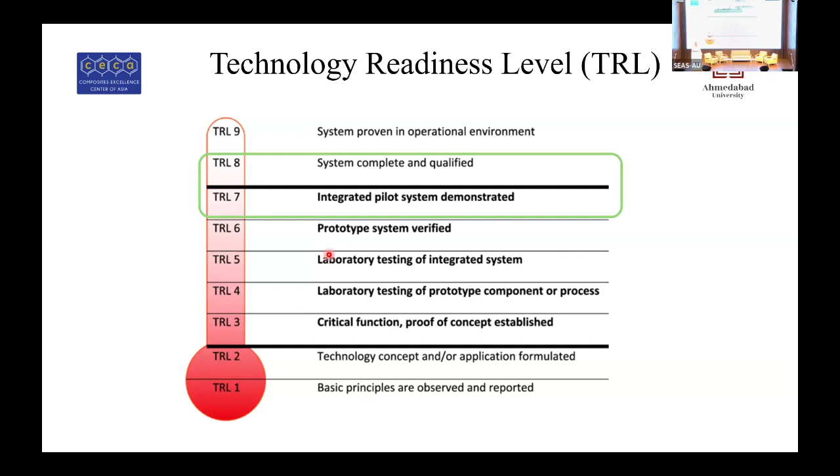So this is what we could do, and this is one of the recent ones wherein at IIT Hyderabad I presented it to one of the ministers. What is his name? Dharmendra Pradhan.

Is there a mistake? No, I'm asking you to think. So please think what directions we wish to move.

Shall we be static? No, definitely not. All those who are in this hall are definitely sincere towards the growth of composites and towards the growth of their own career and industry. So this is the right time that whatever area we are into, composites or integration of technologies, as Professor Shyam also mentioned, he is using the technology. So when he says EV, it has got both composite and automation. So is the dean mentioning that we are going to have a factory of the future, that is the learning factory with all automation in that. So I welcome you all once again, and if you have any questions related to bulletproofing or any other subjects, I'll be more than happy to help you out. Thank you.